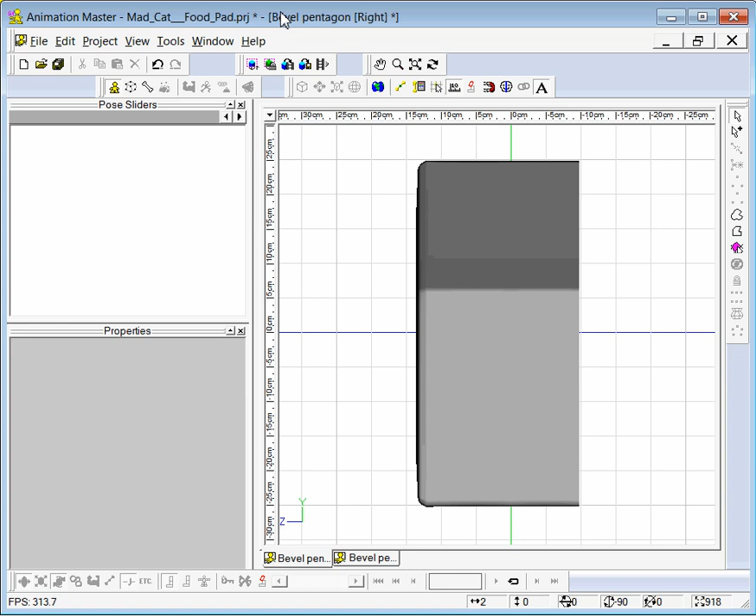Let's say you want to model an interesting shape like a pentagon, and you want it to have smooth bevels, or any kind of bevel, on each of the sides like a good modeler should. But you don't want the creases that happen from the non-standard topology that you use to try and get this shape. And you definitely don't want to have to try and model each one of these little beveled sides individually

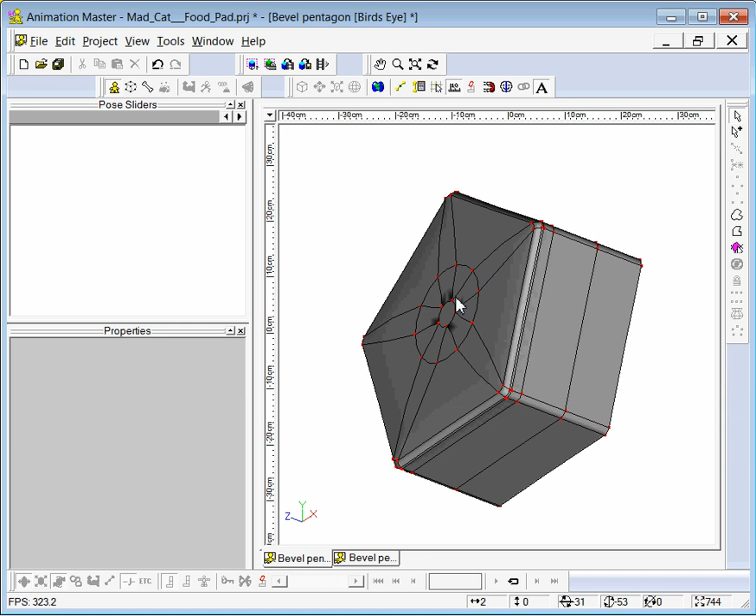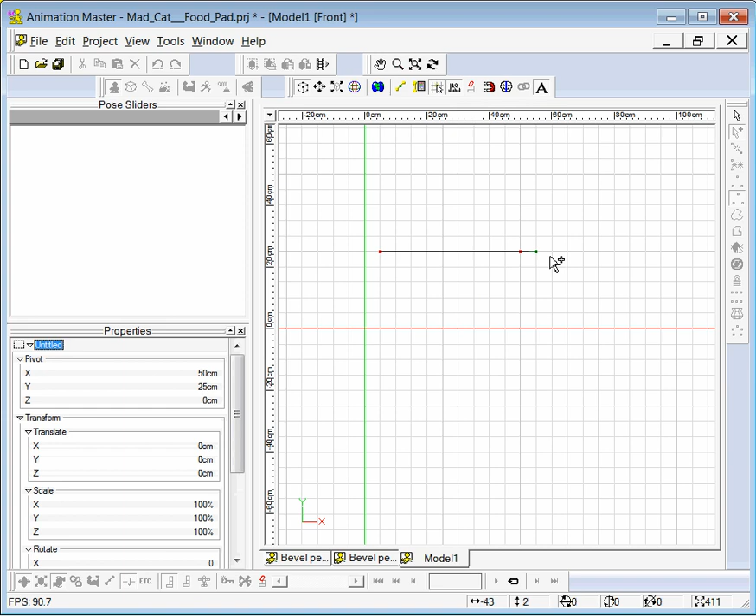and stitch them together. So let's see if we can find a way to make Animation Master do most of the work for us. I'm going to make a new model, and I'm going to zoom out, and I'm going to turn on Snap Manipulator to Grid temporarily here, and I'm going to start drawing a lathe outline around my center green axis. And I'm going to say this is about where my corner of my tablet is. This is like a side view I'm making.

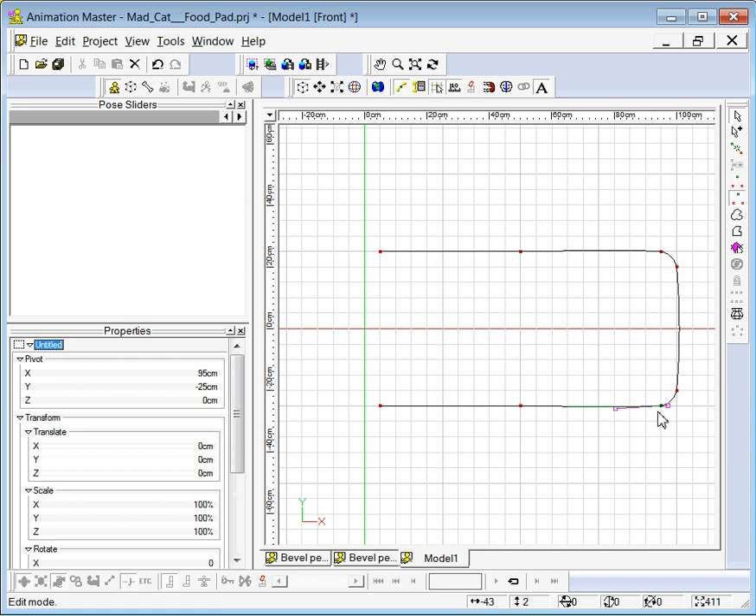So here's my lathe outline. I need to go in and square out these little extra curvy parts, and I need to turn on Show Bias Handles so that when I select a CP, its bias handles are visible. I'll square that, and that one, and that one, and my last one here.

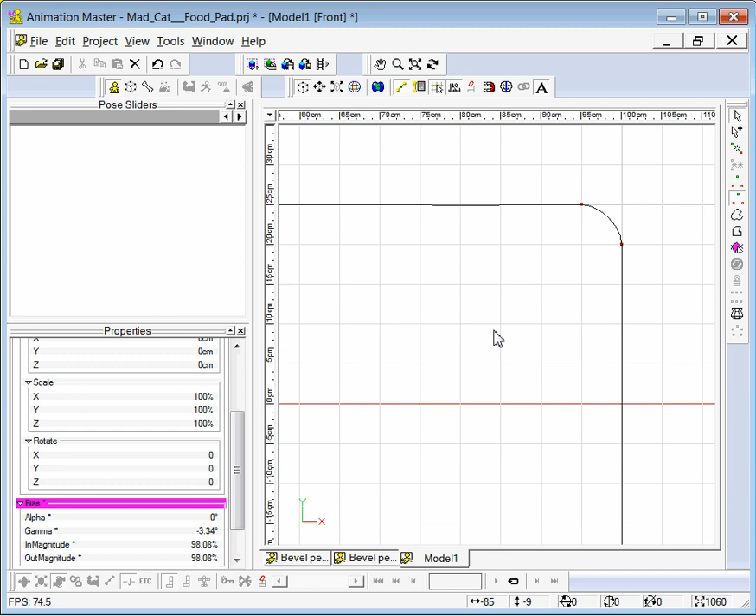And I'm going to zoom in to take a closer look at these. This one could probably stand just a little more squaring, and that one I probably overcorrected. Okay, I'm going to say those are square. Now we just have a lathe profile right now.

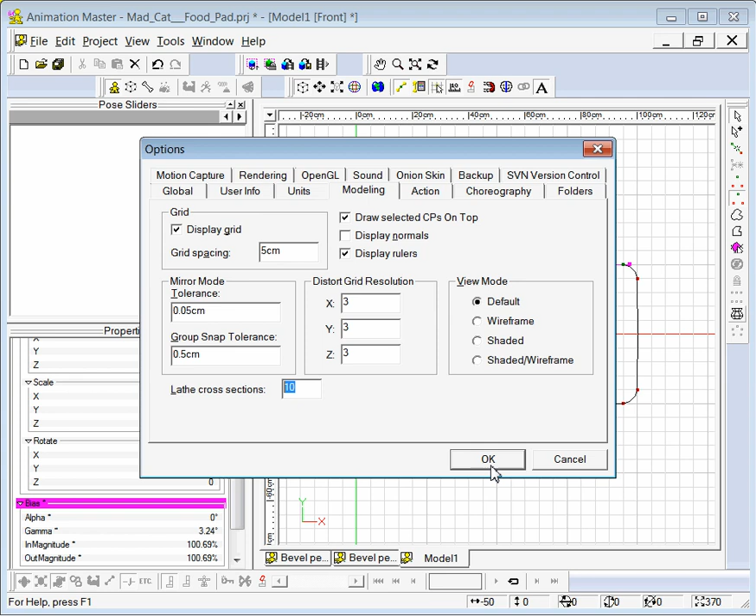I need to lathe that, but first I need to hold down the control key and hit my lathe icon and set this to twice the number of sides of my shape. In this case we're making a pentagon, so I will leave that at 10, and I will select a CP, lathe it out, and magically we have not made a pentagon. We have a circular shape, but all is not lost. I'll go back to wireframe here.

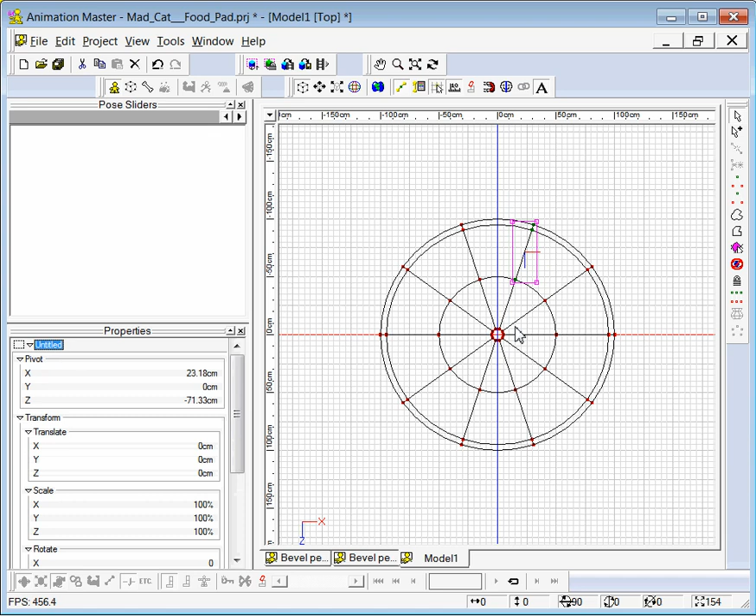What I'm going to do is select every other rib except for the center part, and I'm going to hold down the shift key while I select each additional alternate rib, and I think that's my last one. And notice how this box is a little bit to one side. That's because this spline ends out a little farther than these two do. So when I hit the R key to get the rotate manipulator, the center of that is not at my origin, so I need to fix that.

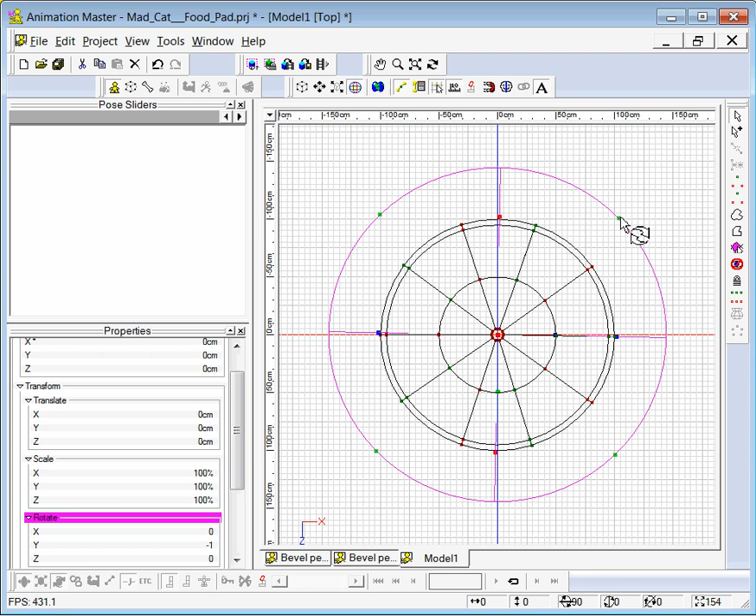I'm going to set X to 0, and that sets my rotate manipulator so it's centered on 0. Now here comes the magic. I'm going to slowly rotate these alternate ribs. And there, I think that's probably about a bevel similar in dimension to what I had on the corners.

Now I'm going to zoom in and hit the enter key to deselect everything. Now I'm going to select the center. I'm going to rotate that again with the R key, so it looks like these center splines are about lined up with their comrades on the outside, and that looks about right.

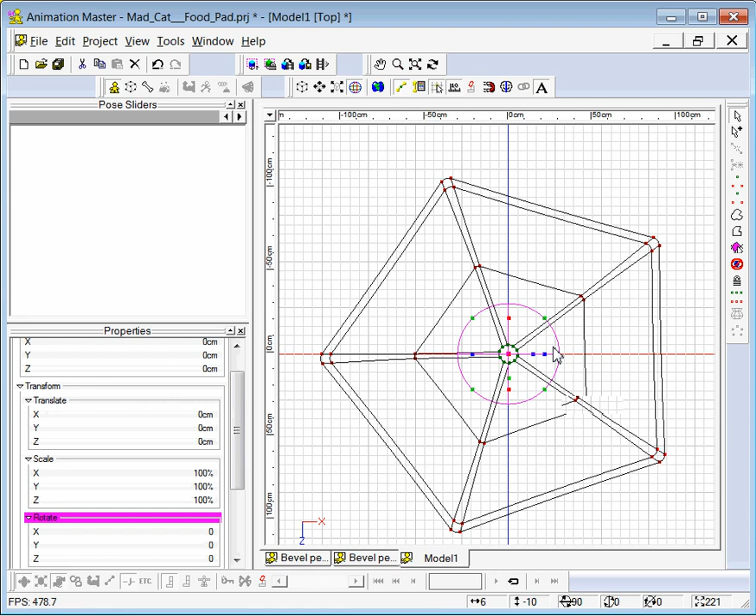Let me go back to shaded view, and let's see what we got here. We've got something that looks pretty darn close to a pentagon with beveled sides. We just need to fix that hole in the center. I'll go back to wireframe here, shaded wireframe. Now let's go back to wireframe. In a top view, I'll select this again. I just want to shrink it on the X dimension and the Z dimension. I don't want to shrink it up and down.

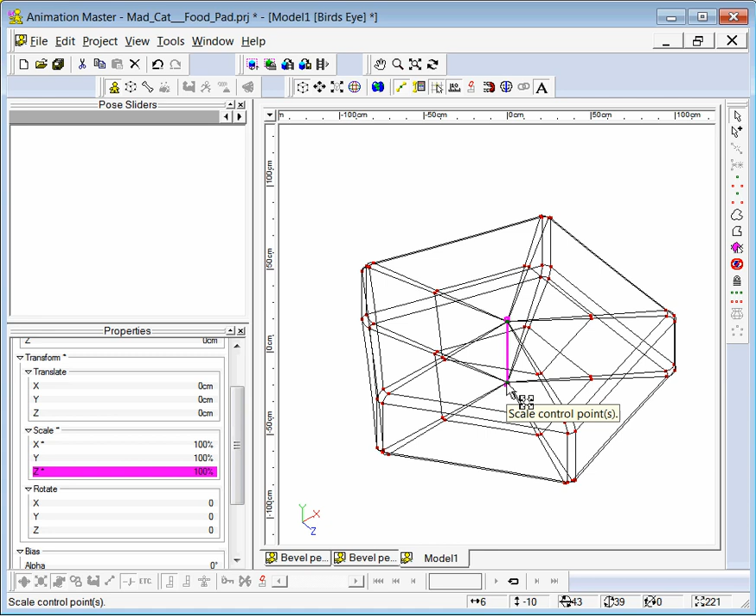So I'm going to go over here to the properties of that group, which is currently untitled, and go to the scale section, and I'm going to set X to just 5% and Z to 5%, and that scrunches that down. And let's go back to shaded view and look around this, and that looks darn near perfect. And that ought to be a beveled pentagon fit for any purpose for man or beast.